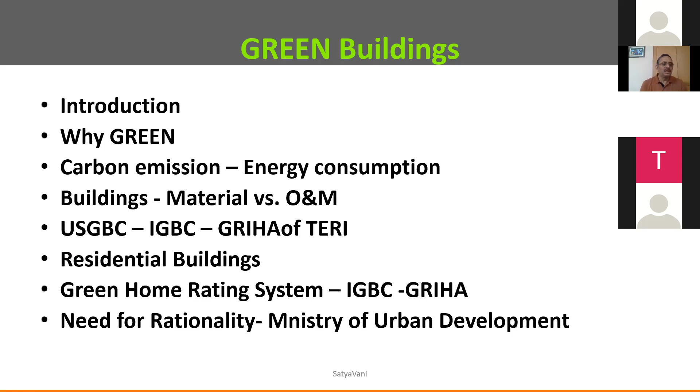Actually, that's what we are going to talk about today, and the need for rationality for implementing these norms, which should be done by the Ministry of Urban Development. And growing population - we all know that worldwide, in the last 50 years, the world population has doubled almost. We have gone up from 3 billion population to 7 billion. And whatever greenhouse gas emissions were done till 100 years back, we added as much again in just this last 100 years.

This is another biggest thing. So we all know there is IPCC, the Intergovernmental Panel on Climate Change, and global warming basically happens due to carbon emission. Let us understand this - what is this greenhouse gas effect actually? Because in a greenhouse, what we do is we construct with a polythene sheet, is it not? And then the objective of that is to increase the temperature, particularly in cold countries, for the nurseries and farming.

The plants need more carbon dioxide and they emit oxygen, whereas we need more oxygen and we emit carbon dioxide. So if there is more carbon dioxide in the atmosphere, it will not allow the infrared radiation to go back, so there will be a greenhouse effect on the globe. So by increasing carbon emissions, we are increasing the greenhouse effect on the earth.

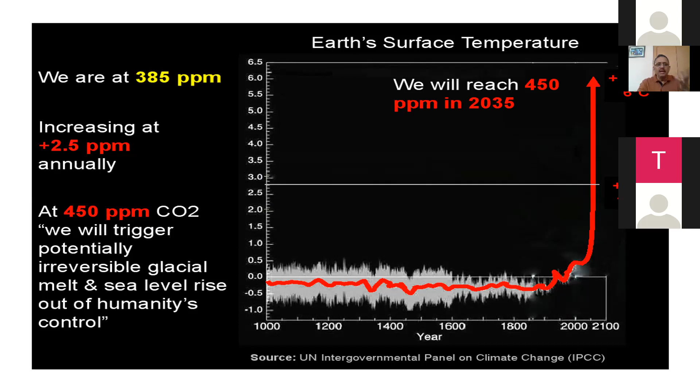So we are at 385 parts per million, and at 450 parts per million carbon dioxide, we will trigger potentially irreversible glacier melt and sea level rise out of humanity's control. Already we are seeing reduction in glacier size - these glaciers, in fact, help maintain our present monsoon conditions. So it's high time everyone takes responsibility for maintaining carbon dioxide emissions at the lowest level possible, and also the energy consumption from renewable sources. If you see carbon dioxide emissions, they are increasing very rapidly.

Carbon dioxide concentration also is increasing. You can see this is the carbon dioxide concentration. We are almost touching the 450, the alarming levels actually.

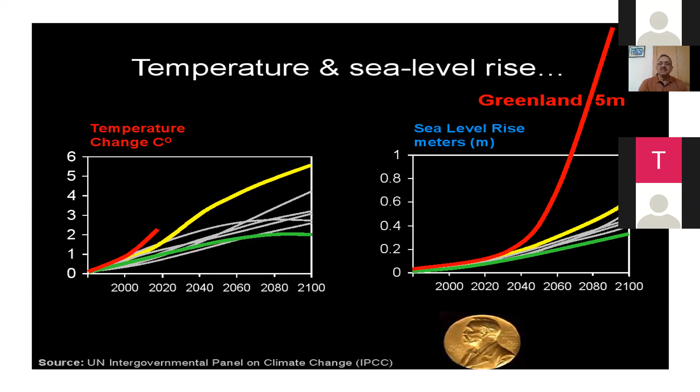So temperature and the sea level rise. With this increase in temperature, we see that the glaciers will be melting and the sea level will rise because of the glacier melting. Whether it is North Pole or South Pole, there will be melting, and there is a prediction of sea level rise of almost 5 meters, which is very dangerous. We will see many cities disappearing, like Mumbai, New York, Chennai, all these kinds of cities may disappear. So this is what climate change actually is that we are talking about.

Now we have predictable climate. Every June 1st week, we expect the monsoon in India and it continues till October, and in November we get the northeast monsoon. These cycles will change if we are not following these green norms.

So climate change is the single largest opportunity for humanity actually since the mobilization of the World War. And now we are seeing the effects also if we, with our rapid growth and mad race of growth. We are seeing the effect. We are all at home now. The nature will not allow us to be irresponsible actually.

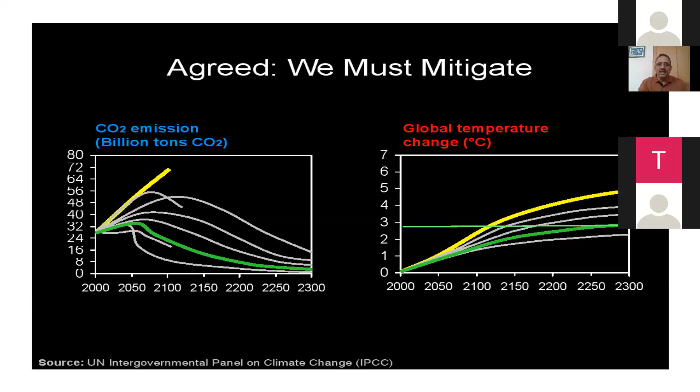And 31% of carbon dioxide out of this 51%, that means almost 60%, is from residential buildings. And in the residential buildings also, 75% of the emission is from operation and maintenance. So only 25% is from materials during construction.

So this is very important data for us to understand, for us to plan responsibly, whether it is building planning, instead of spending more time on materials and all that, because material is a one-time affair, whereas operation and maintenance is throughout the life of the structure. So whatever we plan for operation and maintenance, we have to maintain the emission levels low, and also we have to design the systems that consume low energy, or energy efficient systems.

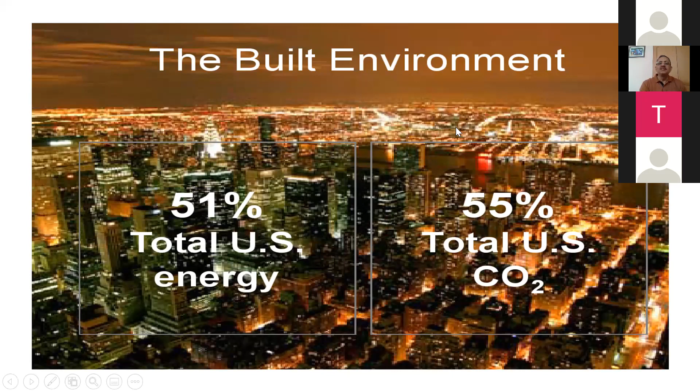And this is the overall in built environment. If you see, of this 51%, 22% is residential, and commercial is 17%. So operations is 39%, overall buildings 9%. This is materials, in operations and in materials. So infrastructure is 3% - roads, water supply, and all that. So this is the overall out of 51%.

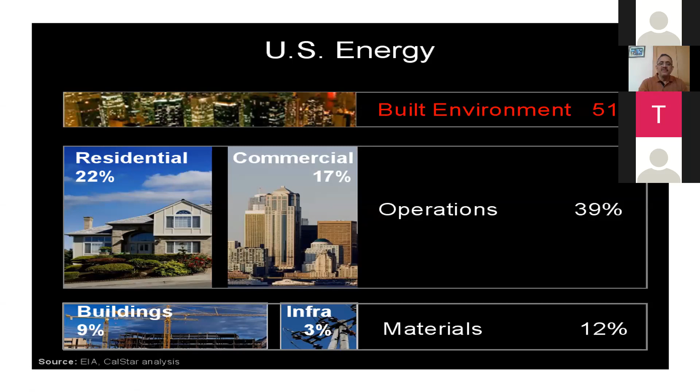So in the overall 100, if you take 100 score of the energy consumption, 22% is going into residential. So this is the single largest segment which consumes energy, actually residential. So this is where we have to focus. Commercial is 17%, and other buildings is 9%. Infrastructure is 3%. So building operations overall is 76% of US energy, industrial is 23%, and transportation is 1% only.

So what are all the carbon emission and energy consumption sources? We see nowadays burning of waste. Many people think that generating energy from the waste is green. No, that is the worst thing that can happen. At the most, we should extract the gases from the solid waste or sewage, and we should never resort to burning of the waste, because that contributes to direct toxic gas emissions and all.

And then coal-fired power is next, actually, which we have to reduce or minimize. And DG power - people are using, we used to see the advertisements that they will provide air conditioners as part of the construction, and then provide DG backup for air conditioners too. That's the most irresponsible thing that we can do, actually. Let us design the buildings that don't need air conditioners, actually, in India.

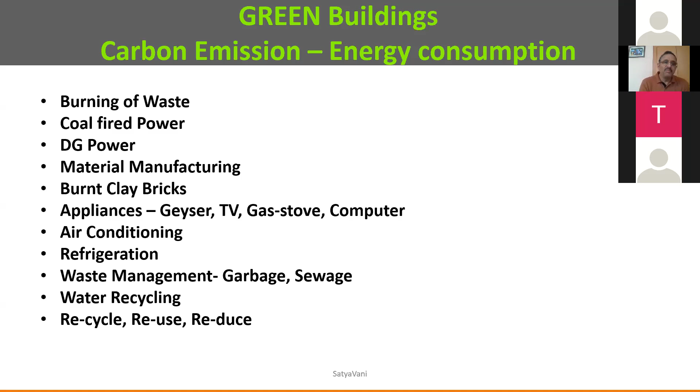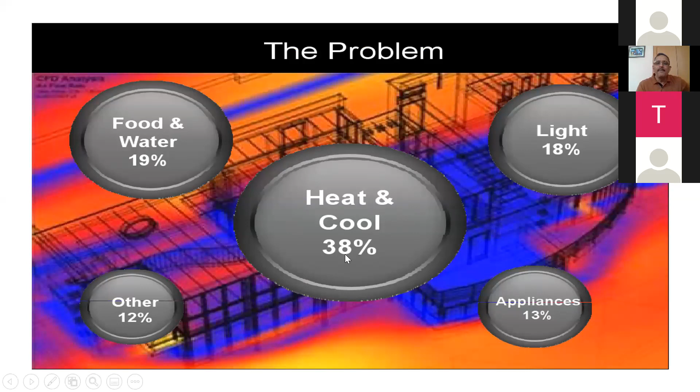So for operation and maintenance, in that we use food and water 19%, heating or cooling 38%, lighting 18%, appliances 13%, and others 12%. This is the energy breakdown. So we know that heating and cooling is the biggest thing that we have to focus on in operation and maintenance. So by 2030, we have to reduce the percentage of energy consumption, and we have to target to be carbon neutral by 2030.

Carbon neutral dates back to 1990 as the benchmark. Whatever carbon emissions we had then, we should reach that level again, which is very tough actually. And green turnover is going to increase.

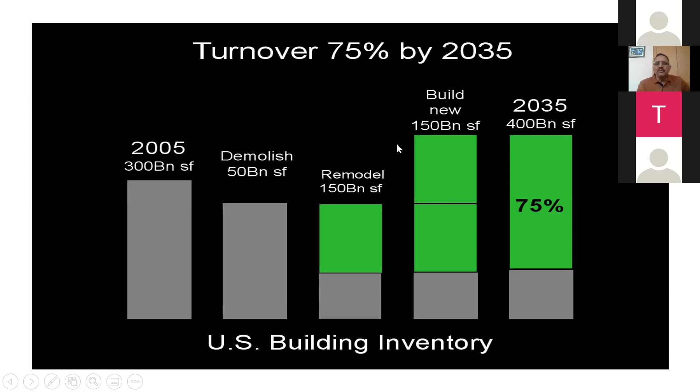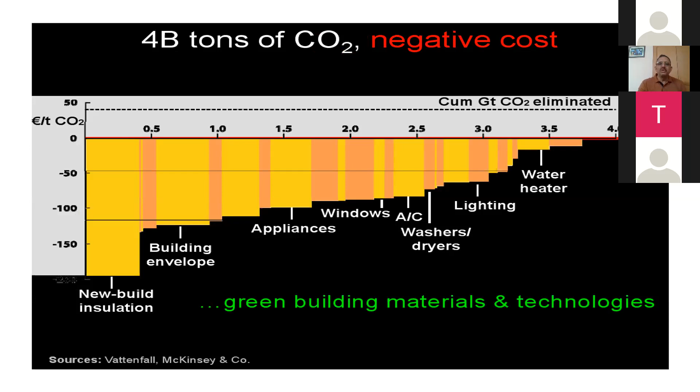So this is the building envelopes. We have the negative, which we can reduce, and new building insulations, appliances, windows where the U factor of the glass we can use will be less than 0.27. And washers, dryers, washing is another big thing, lighting, and water heaters. So these are the opportunities we can foresee for 4 billion tons of carbon dioxide.

So 126 billion tons of coal reserves, we are consuming 2 billion tons per year. That means we are adding 2 new coal-fired thermal power plants. So we have to reduce this and switch over to solar or other renewable energies.

So let us come to green buildings, what we can do in green buildings. In materials, we have to use recyclable materials, reusable materials, and reduce material use.

The surprising fact is we all use TV, laptop, computers, so many in standby mode, even AC standby mode. Standby mode power consumes about 150 megawatts of power every day. So we should learn to switch off, because standby mode also consumes power.

In fact, the idea of green came to me when I was attending a presentation by one of the investors from the US. He was showing something on his laptop in a hotel, and suddenly the battery was going down. Then he put on the power, and the laptop screen brightened. Today also you can observe that when you have infinite power, you will be using more power.

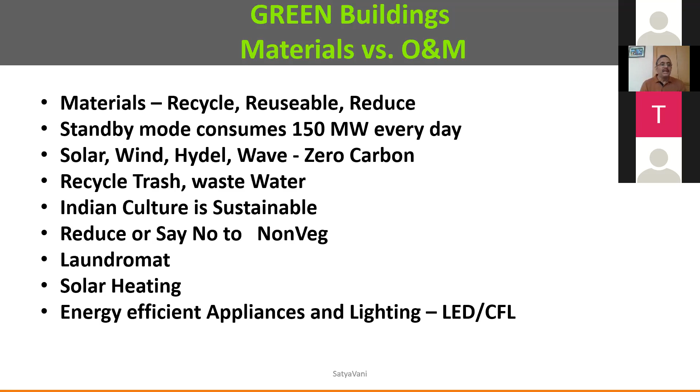And also we should encourage net metering and a dual tariff system in power. So these are all the things that we can implement.

Shading for the windows so that we reduce energy heat absorption, so air conditioning is reduced. We should use high performance windows and insulation so the indoor temperature is reduced. Use photovoltaic solar generation on the roofs so the roof heat is also reduced, and solar thermal for hot water, replacing geysers. Use air recirculation and proper ventilation. And passive cooling or heating with thermal recycling, that is for cold countries.

This is thermal mass. And here thermal storage is always common. In India we have to store the cold, that is a frozen thing. We have these thermal storage tanks even in air conditioning. During the night time, when the temperature is less, you create ice, store it as frozen, and then use it during the day to bring the temperature down.

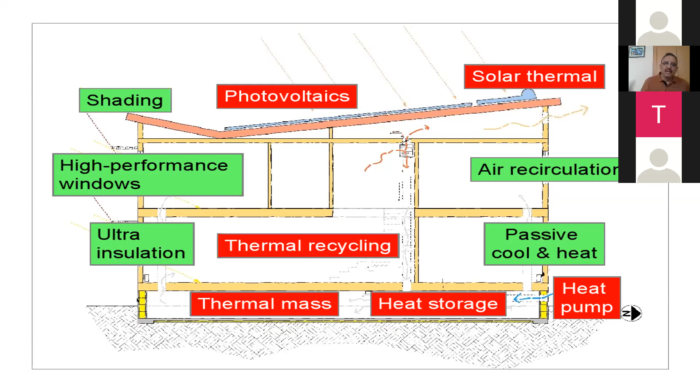So heat pumps are there in India. In hot climates also we can use them.

So we have this USGBC platinum rating, and IGBC was formed in India in 2000, and Godrej is doing this. CII Godrej is heading this IGBC. The IGBC Green Home Rating System is almost like a replica of USGBC, which I'm not happy about. We have to develop our own rating system.

My point is, air conditioning gets 15 points for residential, but in India 80% of the population don't use air conditioners itself. So how can we make them green? The assessment of any green rating system should be connected with carbon emission and energy consumption. We see that the richest people, consuming an electricity bill of 60 lakhs per month, save 10% or 15%, and you call that green. And there are people who don't use electricity at all. Then how green are they? So this is the issue actually.

We have 6 climatic zones in India, and 6 strata of people: ultra rich and rich, higher income groups, middle income groups, lower income groups, and economically weaker sections below the poverty line. So what is the green rating for each of these strata in each climatic zone? ECBC talks about these climatic zones.

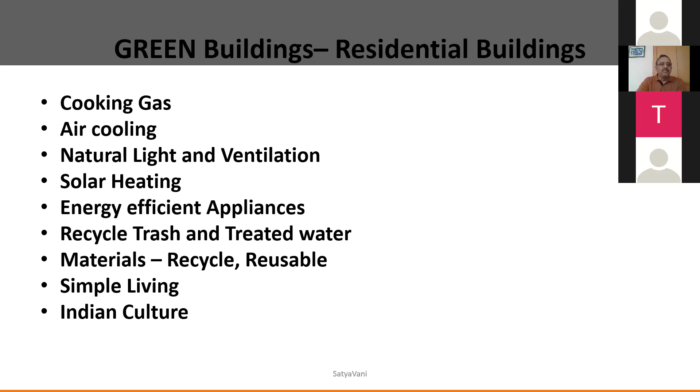Cooking gas, air cooling, natural light and ventilation, solar heating, energy efficient appliances, recycling of trash, treated water, using recyclable and reusable materials, and simple living and Indian culture. These are the main things that we can bring into our design.

So, the platinum rating or 5-star by Griha, is it really green? This is my question. We have to analyze this realistically and rationalize our green design. So these are the site efficiency points that we have in IGBC.

Submit environmental clearance certificate and environment impact assessment, approved by the Ministry of Environment and Forest. You can go for state environment impact assessment up to 150,000 square meters. These are the norms.

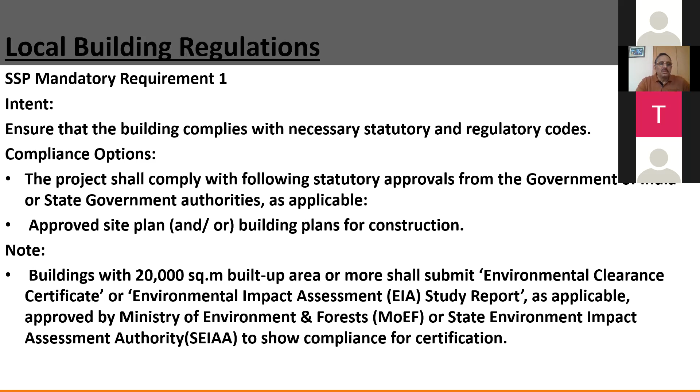And local building regulations we have to maintain to get the points on this. Soil erosion control we have to maintain.

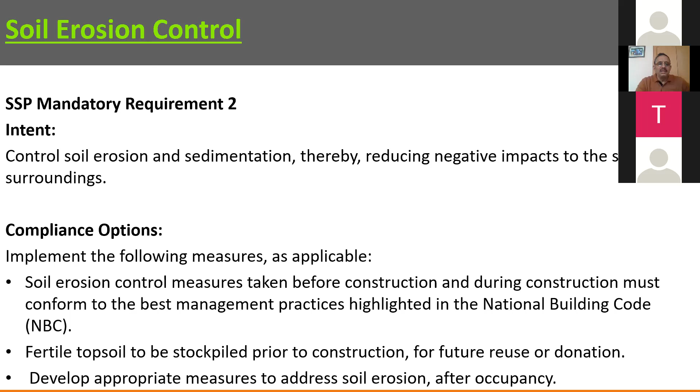If the topsoil in the project is not fertile or suitable for preservation, the project may provide relevant specifications. So we have to plan the design of filling or excavation. We should not dispose the earth from the site, and at the same time we should not spoil the fertile soils. We have to plan this efficiently.

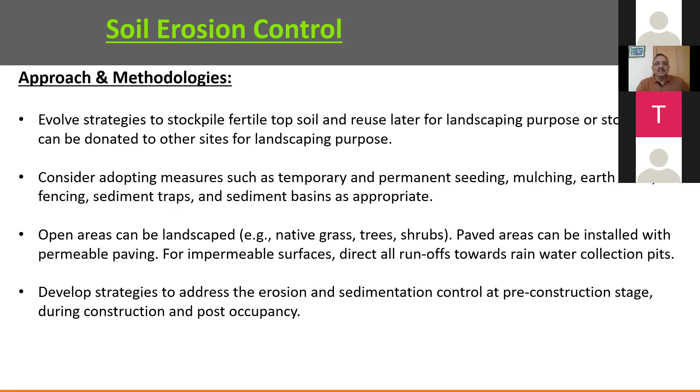We have to document all the design we are doing, the post-occupancy condition, during construction condition, and prior to construction condition. Stockpile fertile topsoil and reuse it later for landscaping purposes. Consider adopting measures such as temporary and permanent seeding, earth dike, silt fencing, and all that. These are all credit one.

The intent is to reduce the negative impacts caused on the environment due to automobile use by providing basic household amenities. And we have to plan compliance options.

Multi-dwelling residential units get 2 points if you select a site with access to at least 7 basic household amenities within a walking distance of 1 kilometer. That means whether it is social infrastructure, schools, and so on. We should plan, as much as possible, walk-to-work concepts along with basic household amenities, compliance options, and required documents and approach methodologies.

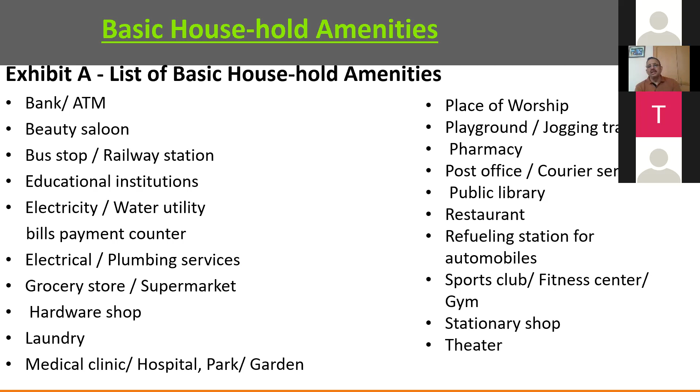The list of basic household amenities includes bank, ATM, saloons, bus stop, railway station for transport, educational institutions, electricity and water utility, electrical and plumbing services, grocery stores and hardware shops, laundry, medical clinic, hospital, place of worship, playground, jogging track, pharmacy, post office or courier, public library, and restaurant. These are all the amenities we have to provide within the community we are designing.

Minimize disturbances to the site. Avoid disturbance by retaining the natural topography; we should not cut and fill huge tracts of land. Points are given for avoidance: greater than 15% for individual residential units gets 1 point, multi-dwelling gets 2 points, and if you save greater than or equal to 25%, you get 4 points.

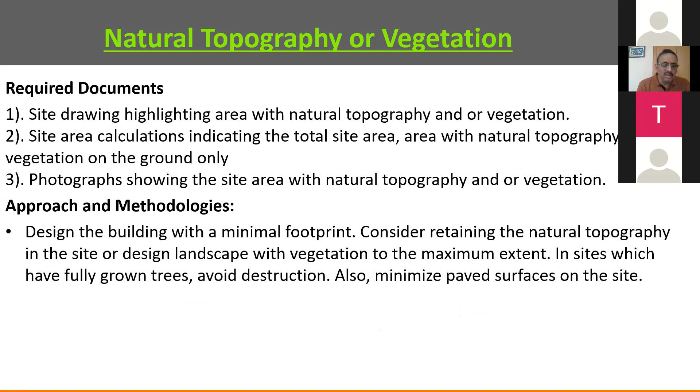Design the vegetated spaces and landscape. Normally, as per bylaws, we have 10% dedicated to green spaces that we have to create. If you create this, you get 1 point, or 2 points for multi-dwelling.

So reduce the heat islands. This is in the design — shade from tree cover within 5 years, and open grid pavers including grass pavers, which help absorption of water. So we have to reduce heat island effects, and these are the intents defined.

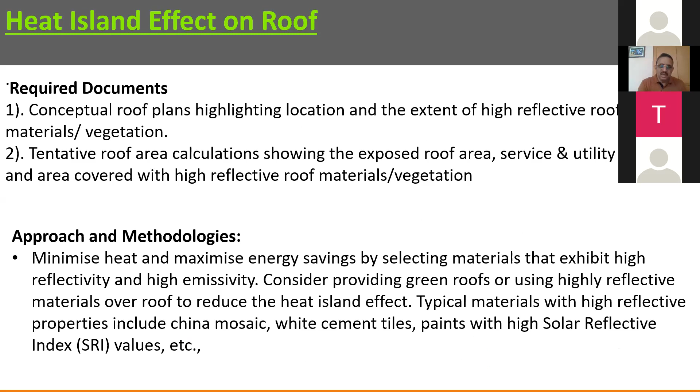I'm not going to train on this rating system, but I'm just trying to give you inputs on various points that are covered in the green rating system.

Design for the differently abled is also very important in any project, whether it is office, residential, and so on. Basic facilities for the construction workforce, that is HSE, is part of this as well.

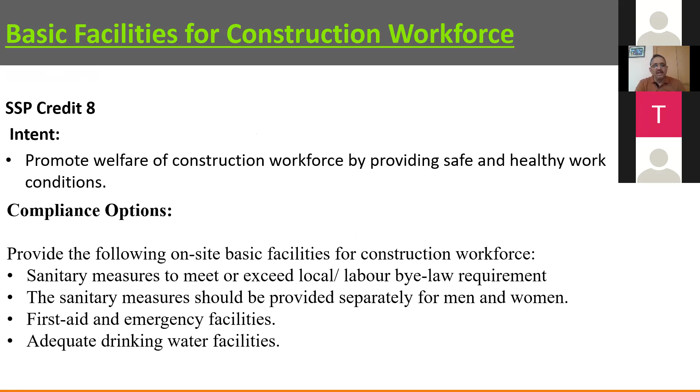Promote the welfare of the construction workforce by providing a safe and healthy work environment, first aid and sanitary measures, and adequate drinking water facilities. Also provide prospective buyers and occupants with descriptive guidelines that educate and help them implement green design features within their flats and houses.

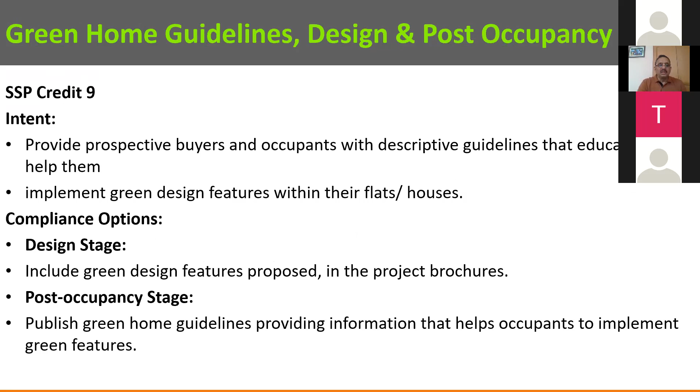There are also points for including green design features. Develop a summary of sustainable design features, tips, and guidelines that can be considered by occupants, and include signages of the green features implemented in the project, along with a program for workers and occupants.

Next is water efficiency: enhance the groundwater table and reduce municipal water demand through effective rainwater management. You should do the conservation of water.

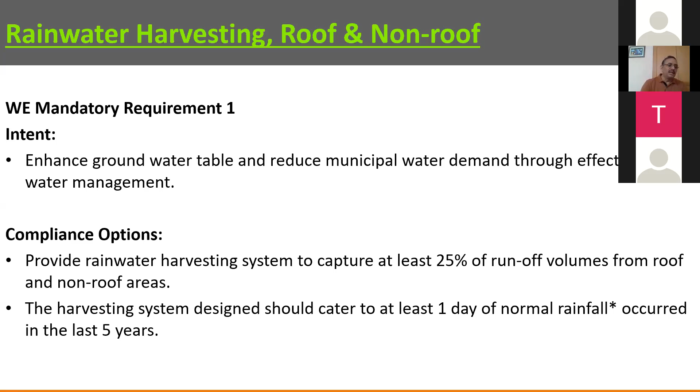Rainwater harvesting should capture at least 25% of runoff volumes from roof and non-roof areas. The harvesting system design should cater to at least 1 day of normal rainfall that occurred in the last 5 years, meaning you should design storage for collection and storage of the rainwater. We should document that we have designed all this.

For water efficiency, minimize the use of municipal water, reduce the load on the wastewater system, and select water-efficient plumbing fixtures whose flow rates and capacities meet the baseline criteria, because energy consumption is also tied to the water supply system.

We've done studies showing that hydropneumatic systems consume less energy compared to gravity systems. So you should, as much as possible, resort to hydropneumatic systems in the water supply, and design landscapes to ensure minimum water consumption, limiting the use of turf on the site so as to conserve water.

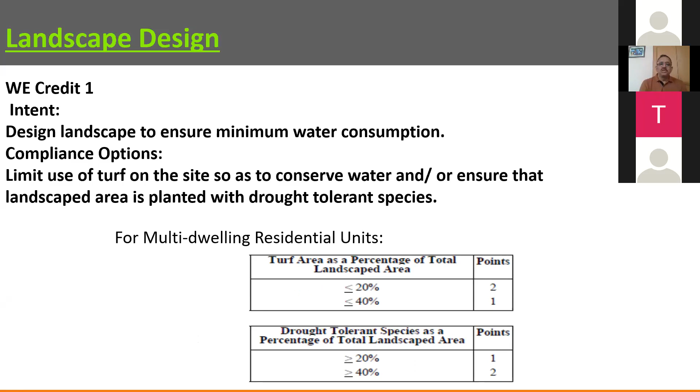So design landscapes to ensure minimum water consumption, and required documentation has to show that. Water efficiency includes central shut-off valves, minimizing water leakages, moisture sensor control, and turf and bedding area considerations. These are all the points in the green building rating.

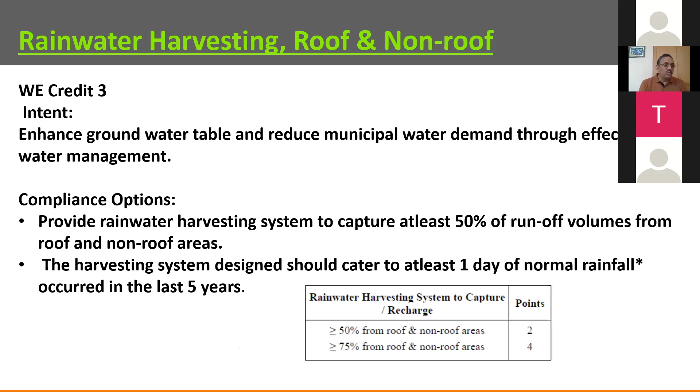For rainwater harvesting, if you capture greater than 50% from roof and non-roof areas, you get 2 points. If you capture greater than 75% and reuse that water for rainwater harvesting and conservation, you get 4 points. These are the water efficiency credits.

For plumbing efficiency fixtures, there is a baseline criteria defined. If you use less than 25% of the baseline, you get 2 points, and less than 35%, you get 4 points. Required documentation includes drawings and specifications.

Reduce consumption of potable water and wastewater generation to minimize the burden on municipal systems. Provide an on-site treatment system to treat 100% of wastewater generated and reuse that water. If you reuse greater than 95%, you get 2 points, and greater than 50%, you get 1 point.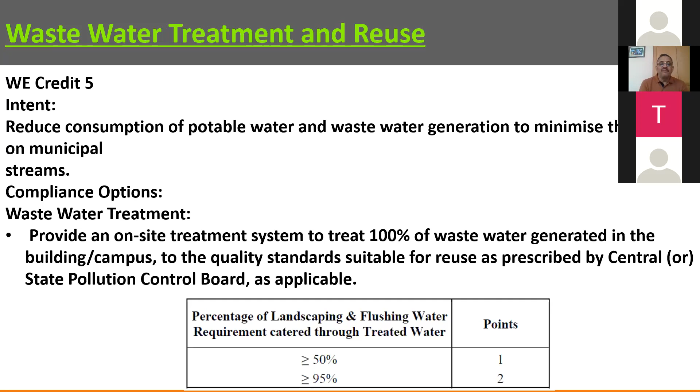Required documentation includes dual plumbing lines - one for potable water and one for recycled water. Recycled water can be used for flushing and landscaping.

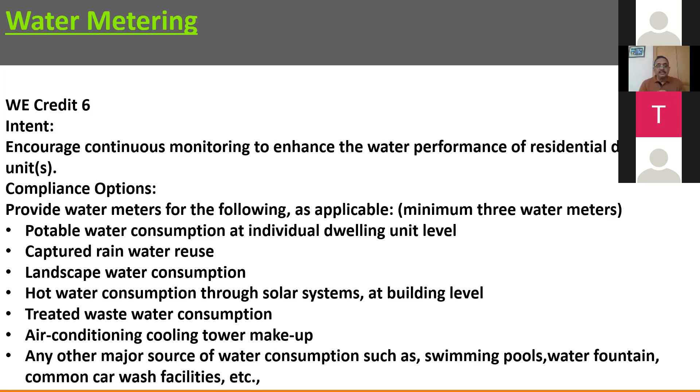For potable water consumption, we have done 4 categories of water lines: super potable for direct drinking, potable for wash basins, cooking and bath, recycled water for flushing and landscaping, and a separate solar hot water line. These are the 4 lines we have to design in the system.

Required documentation for energy efficiency includes using CFC-free refrigerants in heating, ventilation, and air conditioning. This is the mandatory requirement to improve energy efficiency and reduce environmental impact.

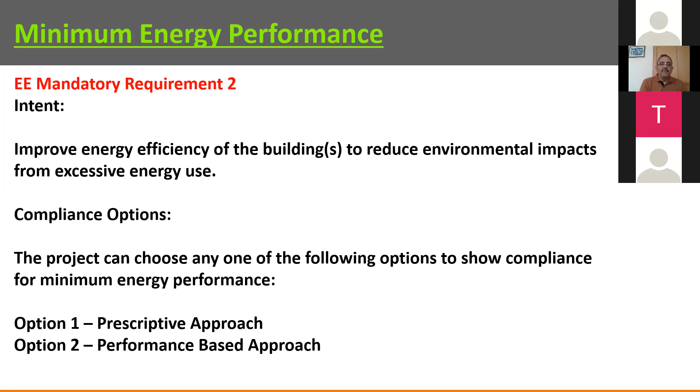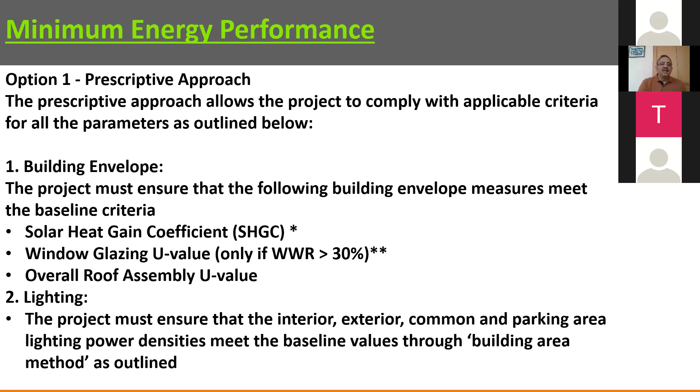We can do a performance-based approach, or option 1, a prescriptive approach covering building envelope, solar heat gain coefficient, window glazing, U factor, overall roof assembly U value, lighting, and air conditioning systems. Simulation-based approach means you can simulate the whole design and prove you're using an efficient building envelope to reduce heat gain.

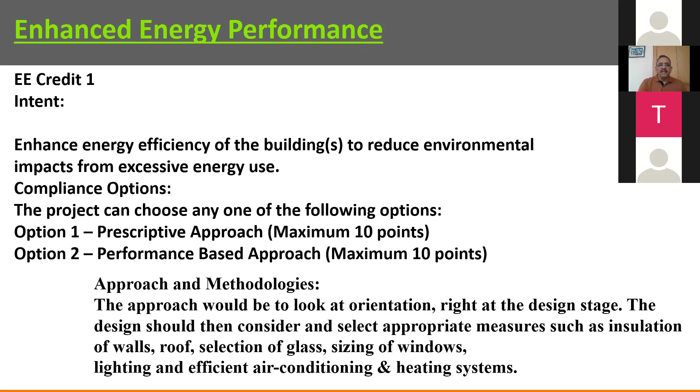Install renewable energy systems for at least 5% of the total connected load of the building, and for multi-dwelling units, 2.5% of the total connected load.

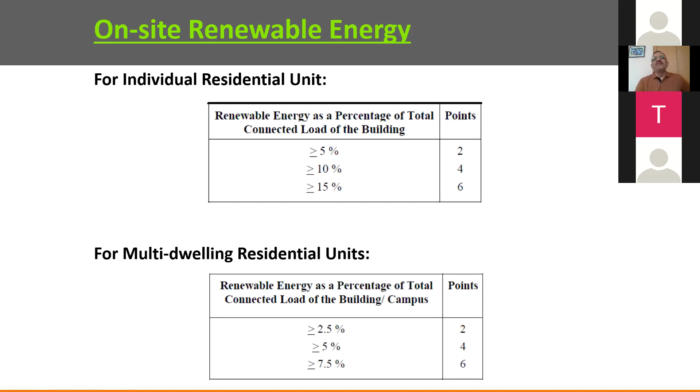So our assessment should be based on a carbon emission model, total carbon emission model actually, because energy is the major thing that contributes to carbon emissions.

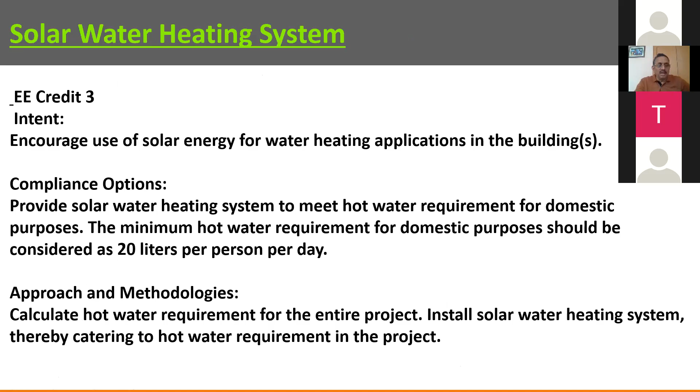Energy saving measures like ceiling fans, electric geysers, 4-star rated appliances, and we should try to switch over to DC appliances. This is my point actually.

These are all the credits - multi-dwelling units get 2 credits for 4-star rated, ISI certified pumps, and 4-star rated pumps with 75% energy efficiency.

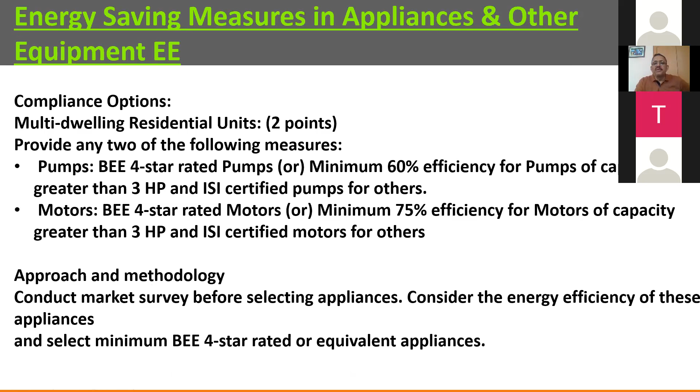It's all connected to the star rating of the appliances, and we should have reduced dependence on fossil fuels for in-situ power generation. That means we should desist from using generators.

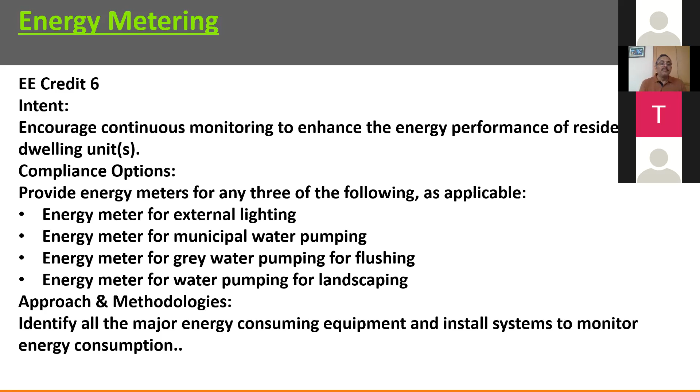Encourage continuous monitoring - this is what I said. We must make stakeholders and end users more responsible, like by showing the data on your mobile or a display at your home, how much power you are consuming every day, what is your power bill. A small display or connected system can help make people more responsible in energy consumption.

Next is materials and resources - separation of household waste like batteries, e-waste, lamps, and organic waste management post-occupancy. We have to ensure 95% of organic waste generated is composted.

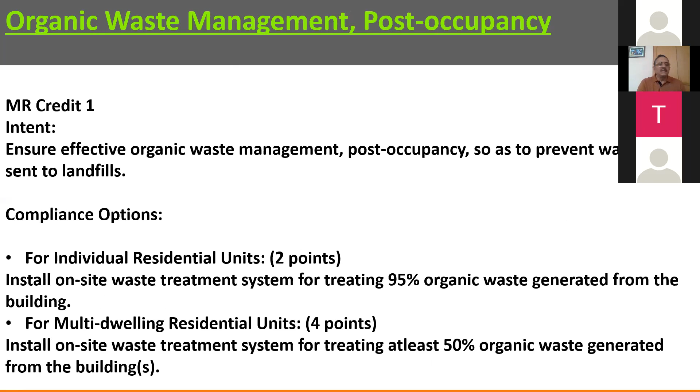This is the organic waste management. For individual residential units, you get 2 points by installing an on-site waste treatment system for treating 95% of organic waste. For multi-dwelling units, it's 50% of organic waste - if you install that, it's okay.

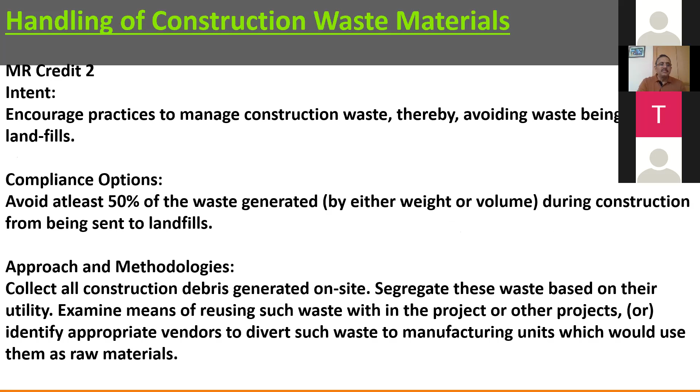For approach and methodologies, we have to show that treatment is possible on-site and show the composting area for on-site organic waste treatment. Another big aspect is the salvaged reuse of materials - encourage the use of salvaged building materials, that is, construction and demolition waste.

In olden days, we used to have clay brick construction, and all the broken bricks we used to use for terrace, brick bat coba for weatherproofing course. So instead of disposing the waste, we should reuse it in construction. You should plan such that whatever dead mortar is used for plain concrete in flooring, we use the brick bats. So this kind of innovative things we have to work on.

And if you are demolishing an old house, you should reuse the doors, windows which are reusable, and steel also can be reused. Floorings, like whatever granite, marble, we should reuse it - flooring, frames, furniture, paneling, all this we should reuse. And we should have recycled content in false ceilings, and concrete also can use recycled content.

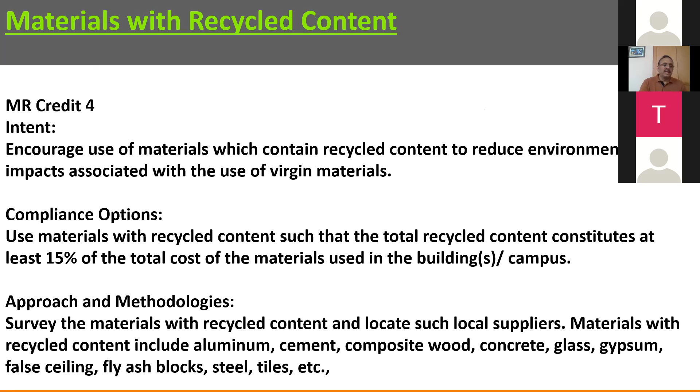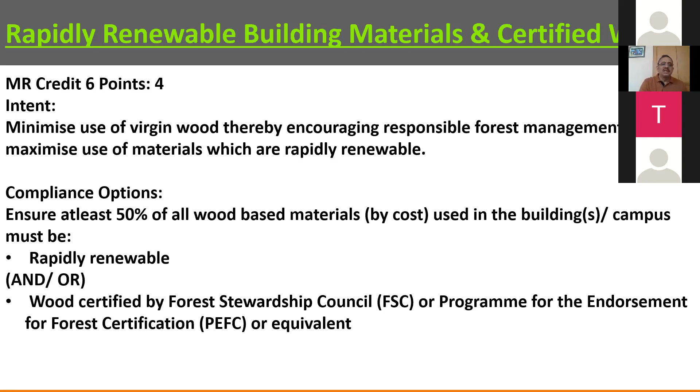And the Forest Stewardship Council, or program for endorsement of forest certification - we have to use wood that is certified by the forest, or mostly we should use engineered wood, that is plywood or manufactured wood, MDF kind of material.

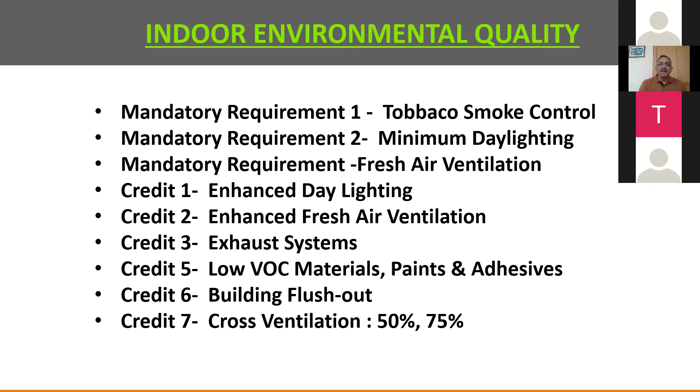And enhanced daylighting, enhanced fresh air - this is indoor environment quality. Fresh air ventilation, exhaust systems, low VOC materials in paints and adhesives, and building flush out and cross ventilation. Flush out is by the draft ventilation, natural draft ventilation.

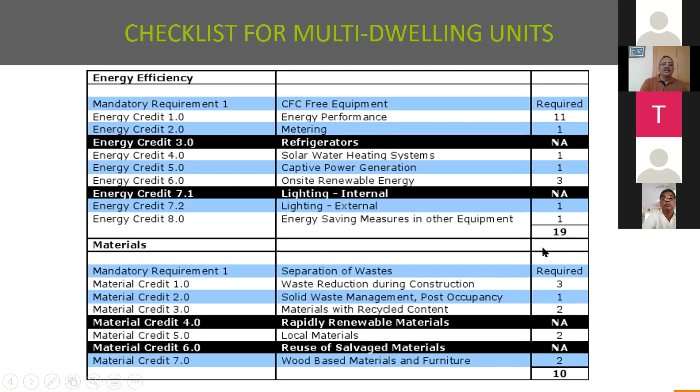Energy performance is 11 required. Then materials, we have 10 points. Indoor air quality, you have 9 points. And innovation, you have 4 points. So total 75. If you get points above 53, you will be rated platinum.

And 45 to 52 is gold. I'm not interested in these numbers, but you have the rating system that certifies if you are above 30 points. I feel that instead of trying for rating, we should work for reducing the carbon emission, reducing energy consumption, and also reducing fossil fuel energy consumption.

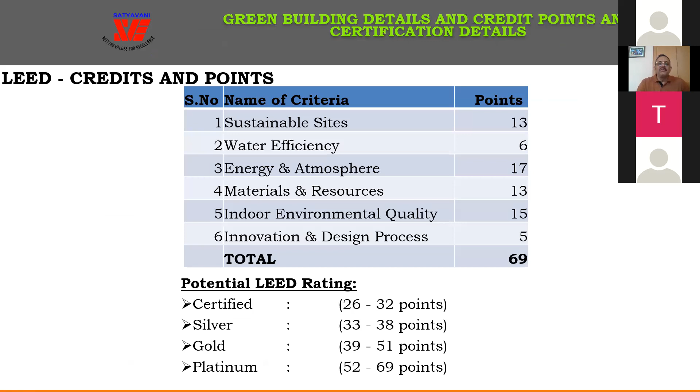So this is the main aim of this. These are the certifications you have - LEED, IGBC, GRIHA, ECBC. LEED certification also - these are the IGBC credits and GRIHA credits. We have done already some buildings like ISB, Indian School of Business.

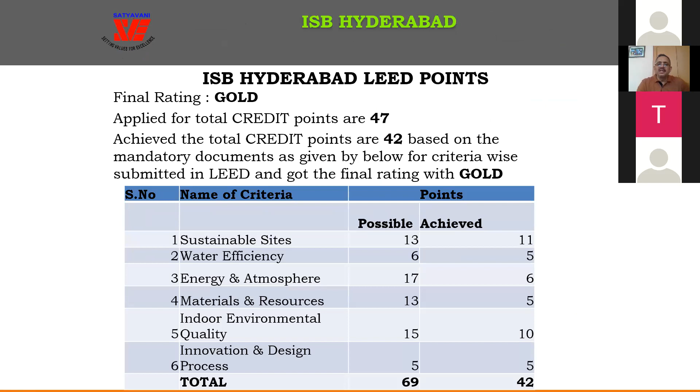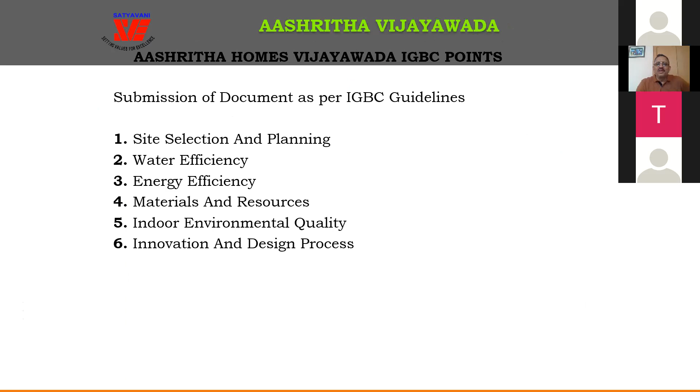And we have done another small project in Vijayawada, which is platinum rated. We also targeted buildings, and these are the target points that we have achieved. It is certified platinum by IGBC. We also have the GRIHA certified projects.

In Navy also, recently we got three-star. Chittubabu, what is the rating for the Navy project?

So these are the projects we certified GRIHA - Green Rating Integrated Habitat Assessment. This is the points similar to that. So GRIHA also you can target and get 5-star if it is above 90, and 4-star up to 90, like this. So this is the GRIHA rating system.

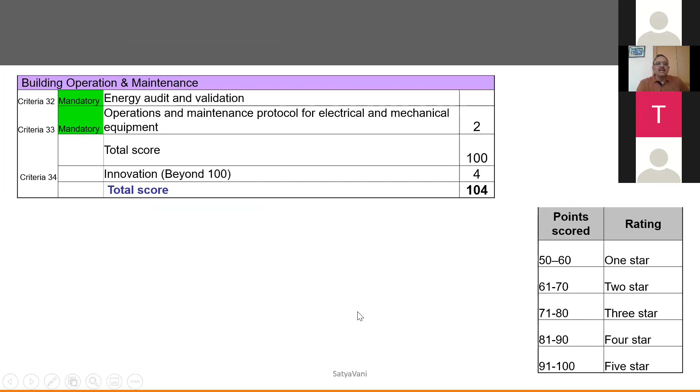And the Energy ECBC also provides the guidelines. Now it is mandatory to have the ECBC certification for buildings in permissions in corporation, urban local bodies. So we must target to use this ECBC norm.

Yeah, now ECBC is the compulsory thing in almost all the states. It is part of the Model Building Bylaws, which is issued by the central government long back. In fact, this work is happening for the last 15 years.

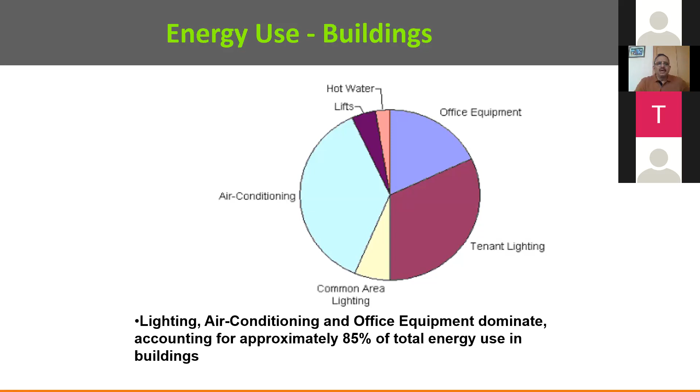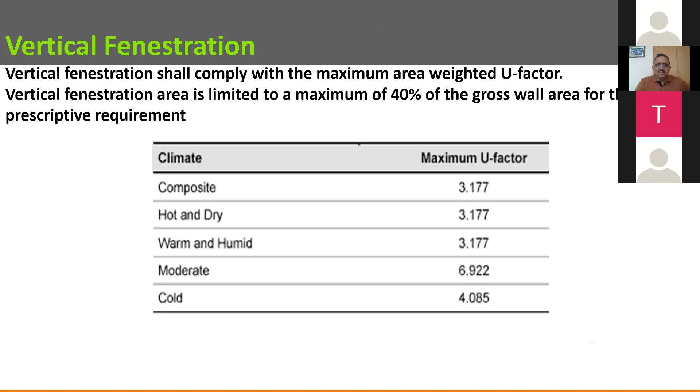On ECBC, you have the points for shape of the building, define the non-regular occupancy areas, and building envelope and materials focus parameters are defined. And the building envelope, mainly the climates are defined, opaque walls. You have the windows, defined with U factor. This is the thermal insulation that will reduce heat penetration into buildings, and natural ventilation. So for roofs and envelope fenestrations, these are the recommended values.

The entire requirement of hot water shall be met by solar energy. This is the ECBC requirement.

Dimming provisions for areas like lobby and common areas with digital analog multiple scene programmable dimmers. We should have automatic lighting systems, so when there are no people, why have lighting itself? I've seen this 20 years back in Europe - when you get into a corridor, only corridor lighting will be on. We have to implement these things as a compulsory thing, not an option.

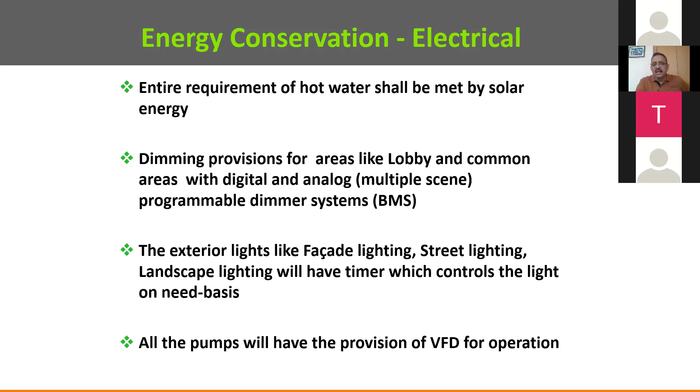Pumps with variable frequency drives like hydropneumatic systems, environmental friendly refrigerants like R134 instead of CFC refrigerants, energy efficient water cooled chillers requiring very less power for cooling, and ductless ventilation systems like VRV. For parking systems, provide exhaust and fresh air circulation into parking areas, and fresh air intake to all areas as per ASHRAE 2004 standards.

So is green a brand or a copyright or to sustain? Sustainable is a carbon energy efficient system, and most heritage old buildings shall be platinum. Green initiative shall be the basis for the future, and rating shall not be something we work for just for advertising or selling. Green is a responsibility. Being green is a responsibility. This is my point of talk today.

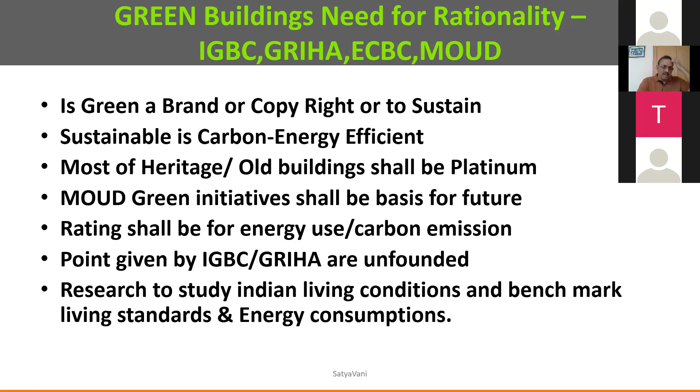Research is needed to study Indian living conditions and benchmark living standards and energy consumption. This is my point - there is a lot of scope for research in Indian conditions. We have to study the actual consumption of power and how we can reduce this. This is the important thing.

We don't have minimum standards for the 30% of people who don't have a house, don't have food, don't have clothes. What green rating are we talking about for them? We have to first give them a house to live in, and give them food to eat. This is the first responsibility.

Climatic zones should be identified and norms developed for each climatic zone separately. Benchmarking for EWS, LIG 1 and 2, MIG, HIG, and luxury homes should be separate. We have to do this benchmarking.

Total reduction in capital and operation and maintenance carbon emission - that is the target. So today if we have X carbon emission, we should target to reduce 10% in the first year, 15% next year, and so on, or decade wise.

We should target net metering, dual tariff, and subsidize taxes and impact fees for green buildings. Otherwise, people are not doing this for charity. Mandatory norms such as solar heating, STP, solid waste management, rainwater conservation, green power, and community washing shall be mandatory - not optional.

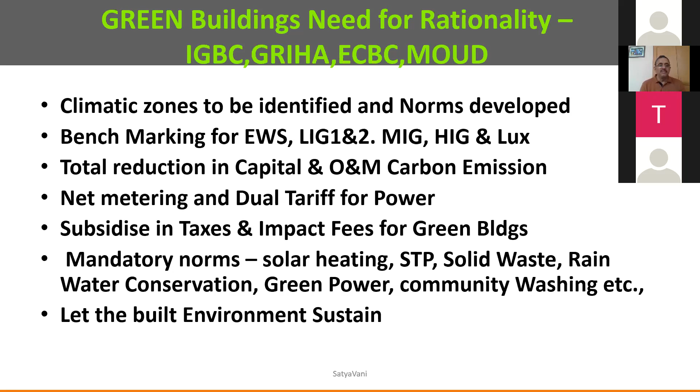Let the built environment sustain. Green buildings are the only way we sustain, given the growing population. So this is about the green building materials that we have to see.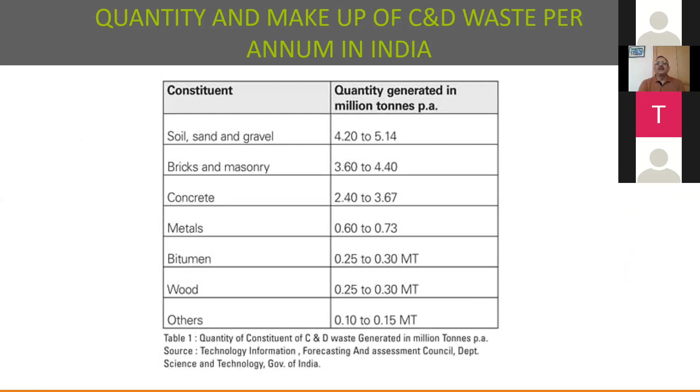I'll quickly go into the materials. The quantity generated in million tons per annum - quantity and makeup of C&D waste per annum in India. We have to reuse this C&D waste for sustainable home construction. We have to plan insulation, framing of structures, and roofing of the structure.

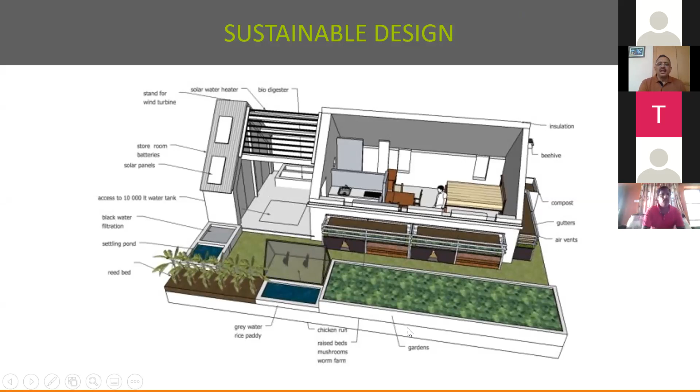So this is a typical sustainable design you can have with the lawn and water conservation, water harvesting. These are all the sustainable design concepts that we have to adopt for all features.

Energy use should be targeted to reduce by 24 to 50%, carbon emissions by 33 to 39%, water use reduced by 40%, and solid waste by 70% disposal reduction.

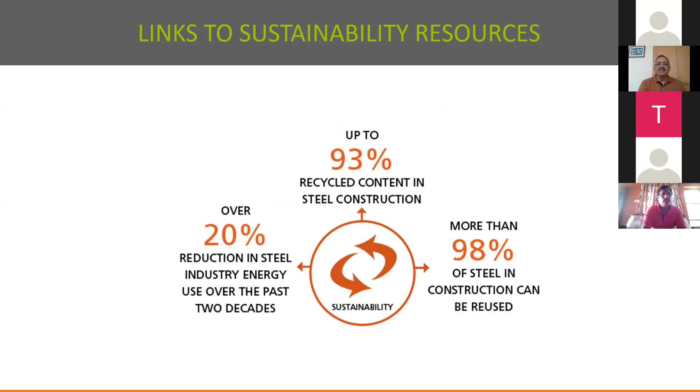Reduction in steel - up to 93% recycled content in steel construction, and more than 98% of steel in construction can be reused. This is the embodied carbon in building materials.

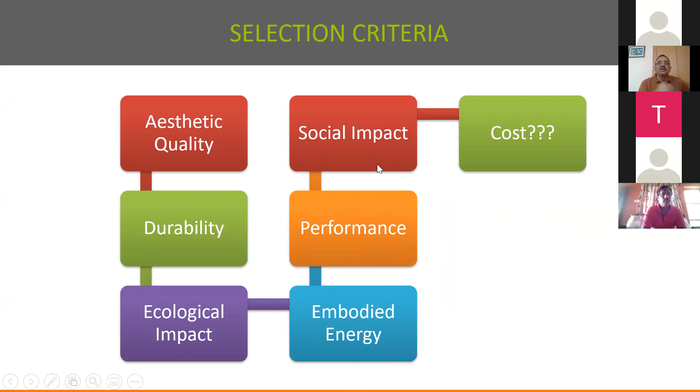Green construction materials - sustainable building materials. We have to consider aesthetic quality, durability, ecological impact, embodied energy, performance, and social impact. That means we should not replace the materials quite often.

So is it about cost versus value? We have to go for the value, the long-term value, life cycle value of the materials.

So these are all the sustainable building materials that we have to use in flooring, wall finishes, cabinets, furniture, solid surfaces, tiles and insulation.

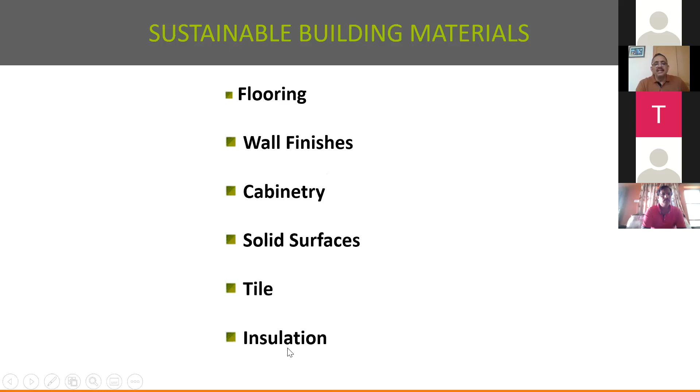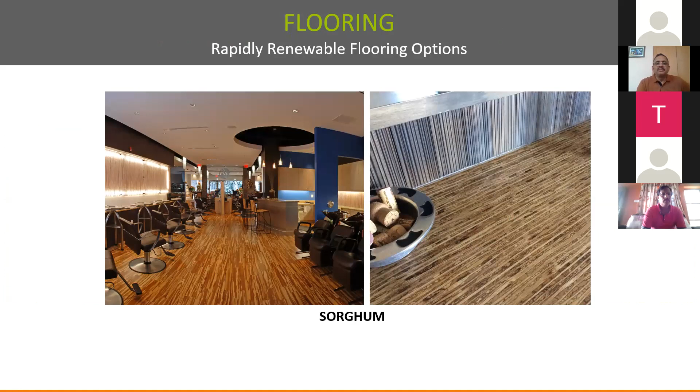Waste-based flooring we can use, FSC certified flooring, or wood sustainable carpeting. These are all rapidly renewable flooring options. Bamboo is one of the best renewable materials, so we can use bamboo in flooring also. And palm-based wood materials, sorghum flooring, eucalyptus flooring, natural linoleum flooring, and recycled aggregate flooring. You can use that also.

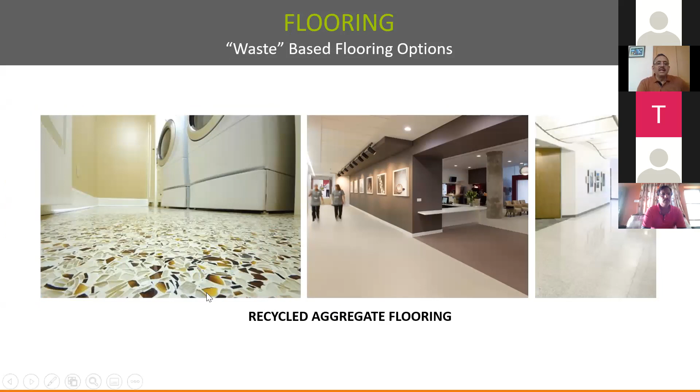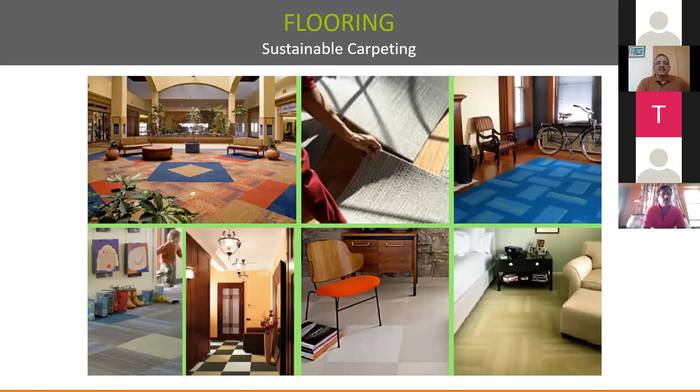You can make terrazzo or mosaic tiles, cork-based material flooring, sustainable carpeting, sisal carpeting, and seagrass carpeting, which we can use in offices. These are all the sustainable carpeting materials, and Forest Stewardship Council certified flooring. We have these wooden floorings, which is all engineered wood.

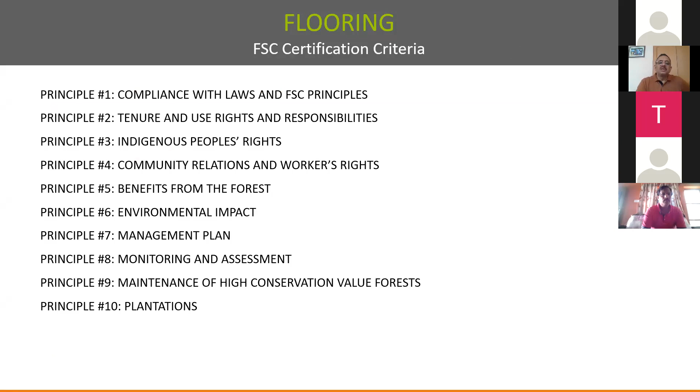For compliance with laws, we should not buy wood that is not allowed by the forest department. So these are all the reclaimed and forest salvaged wood.

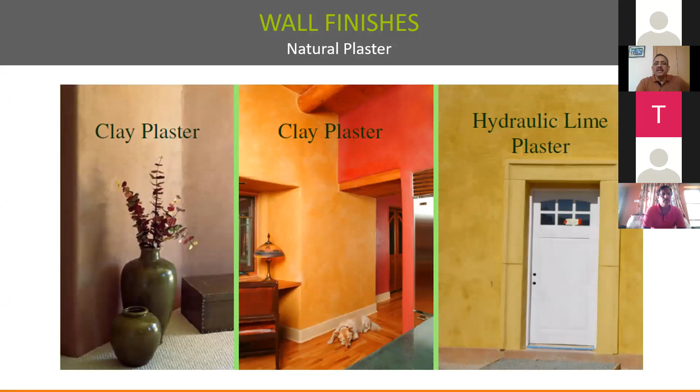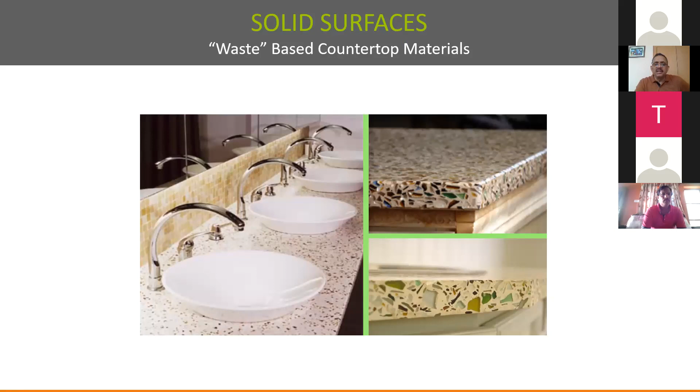We should encourage checking, when specifying any finishes, how much recycled content it has. It is now mandatory to declare the recycled content in each of these materials. So this is the waste-based countertop materials.

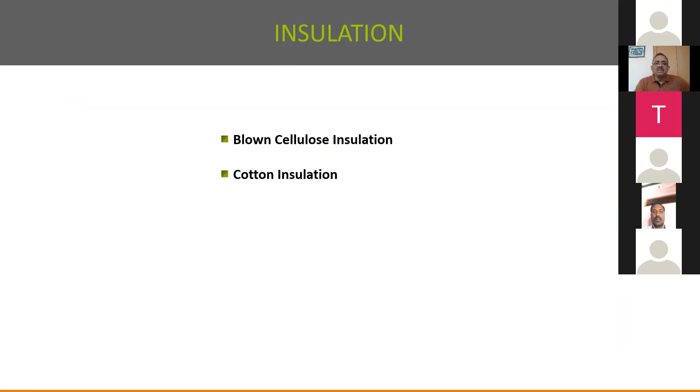And insulation: cotton insulation, blown cellulose insulation. We can use insulation in the walls to reduce temperature ingress. So this is about green buildings, green materials, and sustainability concepts.

So now I'll take the questions. Government is doing implementation of ECBC as a mandatory requirement.

Yeah, it will continue, Mandalji. Engineers Forum meetings will continue. I was occupied yesterday, I couldn't fix the time. That's why I didn't organize it yesterday.

Some commercial buildings are using radiant cooling, not radial. Radiant cooling is more energy efficient compared to VRV or similar systems. That means we keep the chilled water line or chiller line in the concrete slab itself and blow air onto the slab, so you can maintain lower temperatures inside with lesser energy consumption. That is the concept actually - radiant cooling.

Any other questions you have? Oscar, can you mute all? I'm getting some disturbance.

So if there are no other questions, I'll conclude for the day. What are the encouragement contributions from government? That is the problem actually - there is no differentiation between the people who are green and who are not green. That is an unfortunate thing. In fact, the government should tax more on the people who are not green.